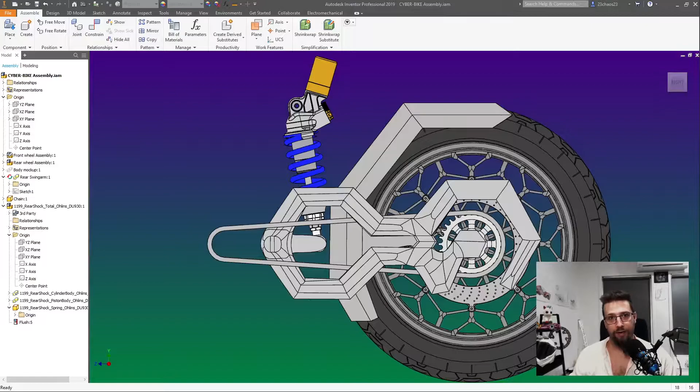But first, let's go over what I've done in the meantime, because I said I'd do some stuff off camera, and I have. I've got quite a lot done off camera. Ta-da! See, I got quite a bit done. This is what we got done. Quite a bit, right? I think so too.

So what is this? Well, this is the rear swing arm. I've imported a set of shocks from a previous model I've used. I'll put the information and a link in the description to the GrabCAD model if I can find it again, I don't think I can, but I'll try.

So what did I get done? Well, you saw in the last episode we got the sprocket done and mocked up this part of the rear swing arm, and what I did off camera was scrap that completely. I kept the sprocket, but made the entire swing arm using freeform geometry. It's tedious, it's fiddly, a lot of just sitting there for about half an hour moving just 3 or 4 vertices until it looks right.

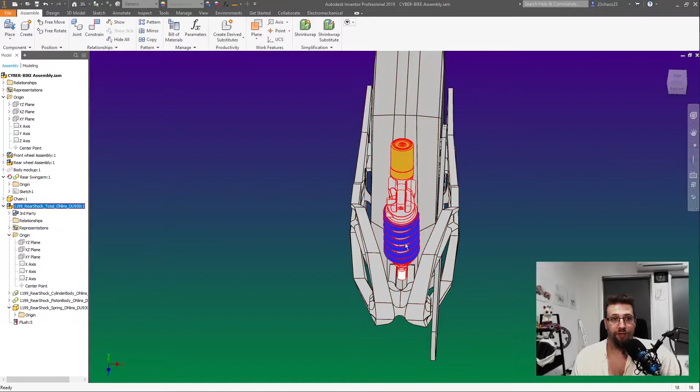It's not fun to watch. It's really not fun to watch. So you can see here we got the mechanism to attach the shock. We've got all the spacing for the... why are you turning sideways? That is bad, don't turn sideways.

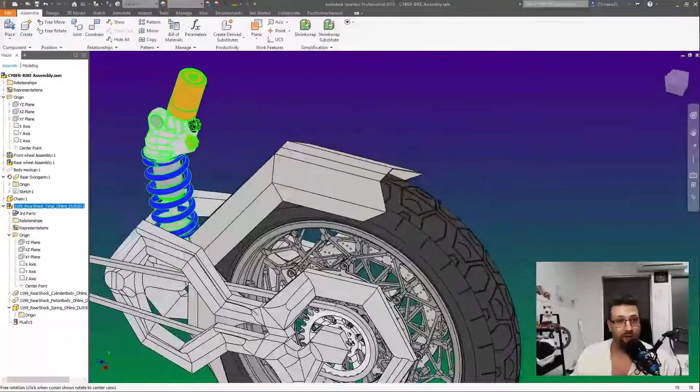Thank you. We got all the spacing for the chain, the bike chain, and I started working on how the calipers are going to interact with the brake disc and the swing arm. There's not much in the way of space to do stuff here, so I might be scrapping the idea of having 2 calipers and 2 discs on the rear wheel.

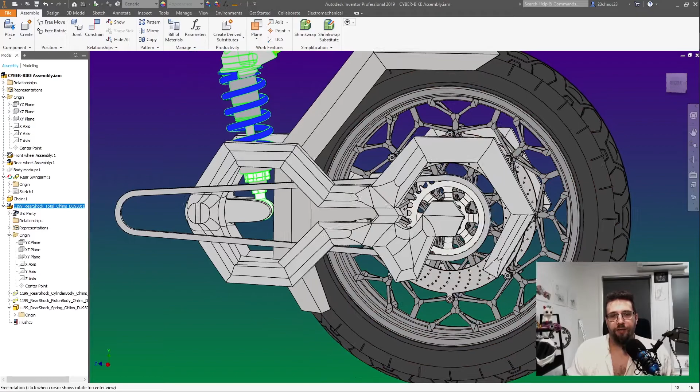This is not normal, it's not necessary at all. You do not need 2 brake discs on the rear wheel. The brake on the rear is rarely used on motorcycles unless you're racing or doing some emergency, oh shit, I'm about to die braking. You don't generally engage the rear brake, it's just not done unless it's for powerful motorcycles where you don't want to pop the wheel or do wheelies, so you just tap a bit of back brake when accelerating and it keeps the front wheel down.

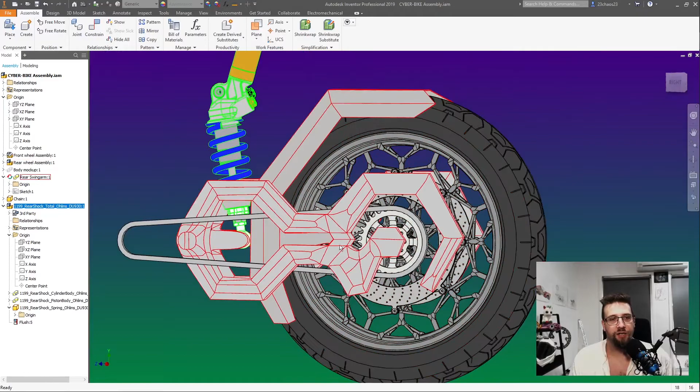They do this in Superbike and MotoGP when racing, to keep the front wheel down when accelerating off the line. Same thing. So I'm not happy with this hook thing at all. I may change it, I might get rid of one of the rotors on the back and just have the one on the other side.

But we'll see. We need to discuss something a little more important, because for the spacing of the rear swing arm, the clearance between the swing arm, the mudguard, the chain, the sprocket, rotor, tire, and the rim. There's a lot that I just listed, and it all has to sit within a certain amount of space, with lots of fast moving parts, spinny bits, stationary bits, bits sliding against each other, bits engaging each other, like the chain and sprocket.

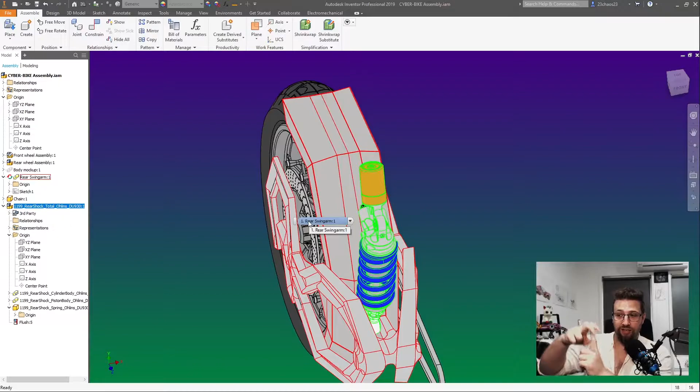There's a lot going on in a rear swing arm and rear assembly on a motorcycle, and it all has to work. Has to. If it doesn't, shit explodes. If you've never seen a chain come off a rear sprocket when a bike's moving, go look it up.

It's insane. So that's what we got done off camera. Quite happy with the amount of progress.

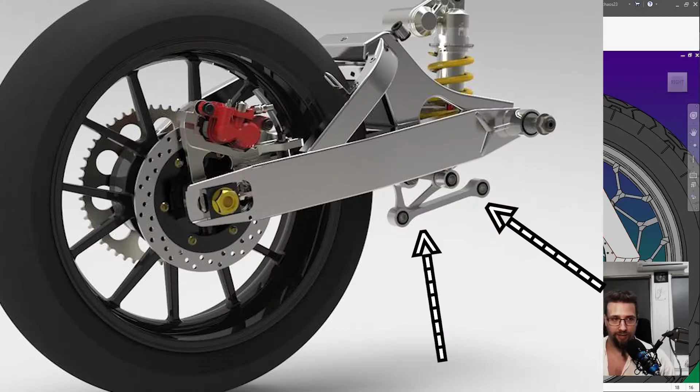A couple of things I still need to research and learn how to do. One is a travel multiplier assembly for the shock absorber. Normally in rear swing arms, there are other linkages and levers arranged in a certain way that when the swing arm moves a small amount, it multiplies that travel through linkages to the shock absorber, so the shock absorber moves further than the swing arm did and reduces the force applied to the shock absorber. So it's a travel multiplier but a force divider, through some complicated linkages.

Not really complicated, but I need to go learn how to do that, because at the moment this is not right. Having it directly applied like this, it won't work. There's going to be too much force and not enough travel distance allowed through the shock for this to work properly, so I have to go learn how to do that.

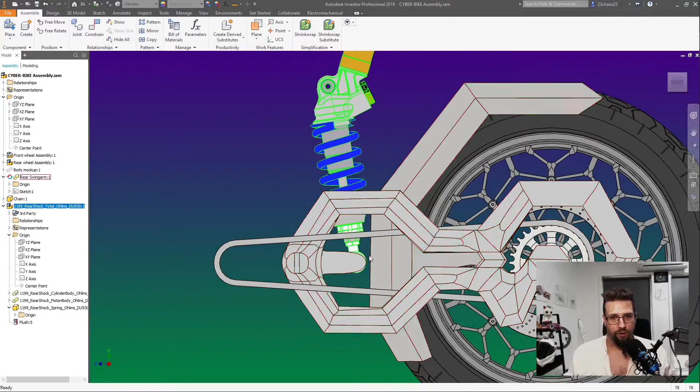But today's video is not about that. Today's video is about brake calipers. Oh boy, there is a lot going on with brake calipers. They are a complicated subject. There's a lot of moving parts, a lot of engaging parts, a lot of stationary parts, and a lot of non-stationary parts - meaning they move, but they're dynamic. They're non-stationary dynamic parts that change over time.

For instance, the brake pads, as they wear, their thickness changes, which means other moving parts like the cylinder head have to travel a different distance and be in a different position compared to a brand new brake pad. There's a lot of stuff going on. You have thermal engineering, ablative engineering, hydraulic engineering, and mechanical engineering of course. There's a lot of different things that have to be accounted for when designing and considering how brake calipers work.

The other thing that needs to be considered is industry standard. Here's a topic we're going to have to come back to time and time again with this project, because with motorcycles, industry standard is the industry standard. A lot of companies make parts, consumables like brake pads. There's a list of stuff - tires, all that stuff - that conform to industry standards.

Things are the same across the board, so you can go to a shop and get a non-OEM part to replace the part on your vehicle at a lower cost, or just because you want something different. They all follow certain rules, and we're going to have to apply those rules through this project.

One of the places where this is really critical is brake calipers, because the brake pads aren't made by the OEMs or the motorcycle manufacturers. They are made by brake companies, and they have standard forms, shapes, and designs. Sometimes a big OEM manufacturer will come along and say we need a caliper that looks like this because it has to fit our new bike, and they make a new pad that works for it.

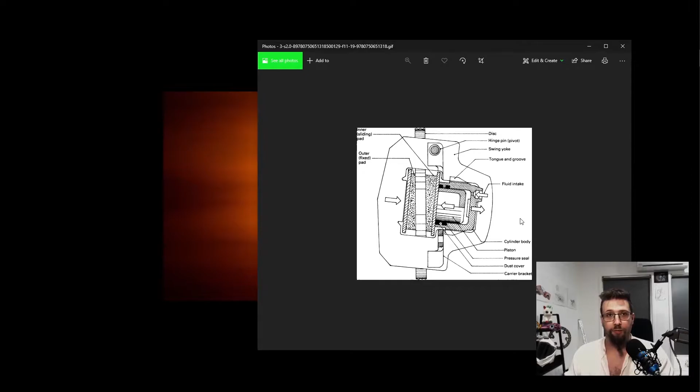This is counted by the number of cylinders you have on each side of the rotor. Some calipers have a cylinder on just one side, and then there's a mechanism that equalizes the pressure on the two pads. One of the simplest versions of this kind of mechanism is the pivot caliper. This works through a simple process: you have a pivot point here and a single cylinder here. When the cylinder engages and pushes on this pad, the entire assembly shifts, and when it shifts, it then applies pressure equally on the other side.

This means that your pads, as you can see here, have a trapezoid shape. Is it trapezoid? No. Scalene? I think it's scalene. No? There's a name for this.

Anyways, they still try to wear evenly, but the point is that they start off uneven, and you only have this limited lifespan of pad at the bottom here, and you end up wasting this much pad at the end of the pad life, which isn't ideal since you don't go all the way to the bottom. It's really unrecommended to go to the bottom of your pads. This is probably the simplest design of single cylinder caliper, but I don't like it.

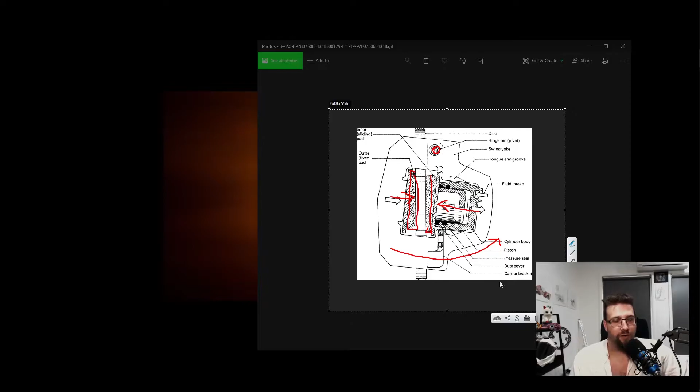There are other problems involved. If your alignment to the disc rotor, or the disc rotor has a warp in it, a bend, or damage, these things create violent vibrations in action and all sorts of other problems that I really don't want to deal with. So this one is a no-no.

The next kind that we have is the floating caliper. It's the same principle: you have a single piston on one side, and when this cylinder engages, the entire assembly will float, usually on a set of rails with rubber bushings, and the entire assembly will then move this way, which engages the pad on the other side with an equal amount of force.

These are very common, but as you can see, it requires a floating point, a point of friction. They're actually very simple to manufacture. They're one of the most common brake calipers out there. You can see this is for a vehicle with a vehicle rotor, much thicker. They work very well. They're space efficient, so they don't take up as much space inside the wheel assembly, and that's why they're commonly used on cars and stuff.

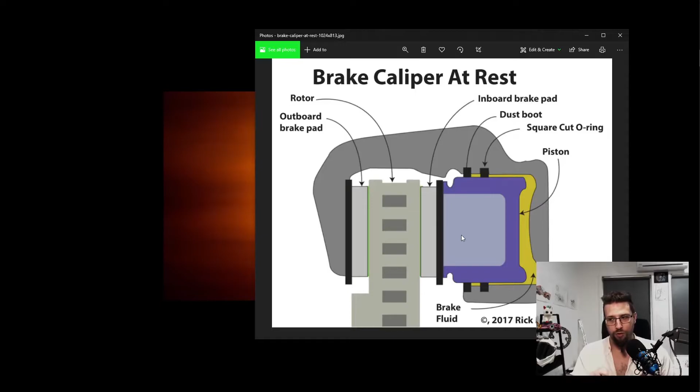But the caliper with the most performance is the dual cylinder caliper. And the dual cylinder caliper is also probably the hardest to manufacture, because you have internal channels for the hydraulic brake fluid to travel through.

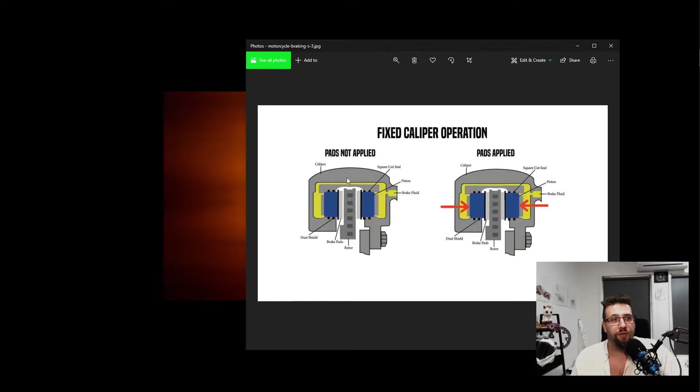All of these different calipers are generally cast materials. Some of them are billet machined housings. Some dual cylinders are split - this is a good example of a split caliper. You have a machined part, it starts off as a cast, but they do billet machine it. It's either cast or billet machined caliper housings.

You have two parts, secured using screws. One of these screws is a special kind that has a through hole, which allows the hydraulic fluid from one side to travel to the other side and equalize the pressure against the two pistons. This is a 6-cylinder pad, but it is a dual cylinder caliper.

These are very high performance, and this one in particular is the one we're probably going to model after for our perimeter rotor. Thank you, Ivan, in the comments of the last video for suggesting it's called a perimeter disc. That does seem to find more results on Google when you use those terms.

So this is the caliper that is used on the Buell motorcycle. Now, we're not going to go out and buy Buell motorcycle parts because I had a girlfriend with a Buell and the parts are expensive. They are very expensive, and we will more than likely only go with the pad itself, and find dimensions for the pad and design the rest of our caliper around it.

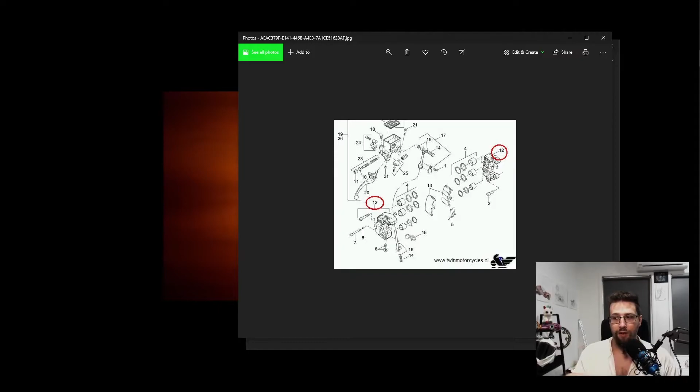These are special in the way that the pad attachment points are on the inside of the radius of the design, whereas normally the connections and bolt-on points are on the outside of the radius because the rotor is on the inside.

This is what we're going to go with, but the number of types and designs are so many and various. This is a single cylinder floating design, similar to what's on my dirt bike.

So you've got a single cylinder, it's one-sided, and it is also on a floating rail. You have your attachment mount here, which attaches to the axle and the front forks. Then on top of this, you have your floating carriage where the caliper itself, which is a single piece, floats using these pins, and it slides into position to equalize the force on the pads.

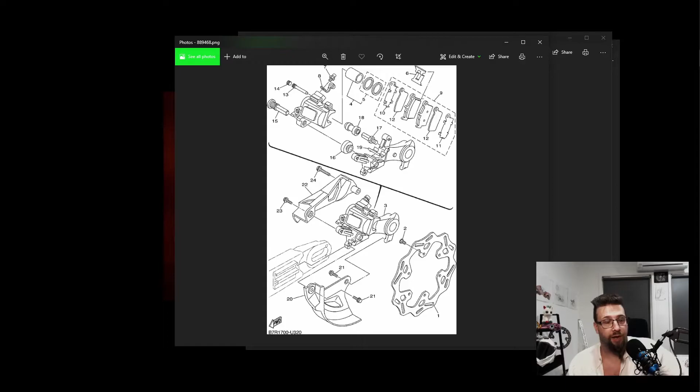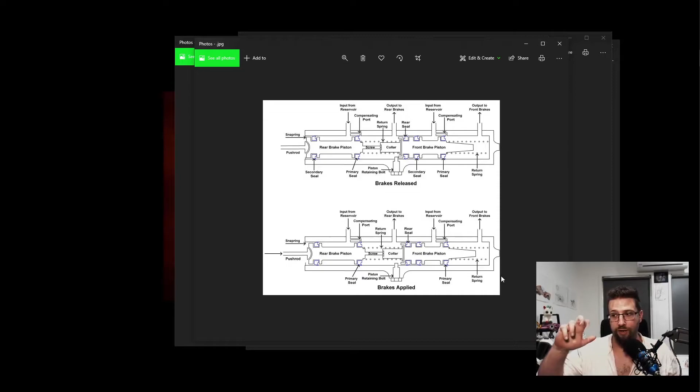We have other things we can consider later on, like the master cylinder itself, which is the hand trigger thing on the handlebars. That uses a system that allows for compression, force release, and return of hydraulic fluids. This is a simplified cutaway of how that works.

This is an external radius caliper design. This is a Brembo brakes design for motorcycles. This is one of the more difficult ones.

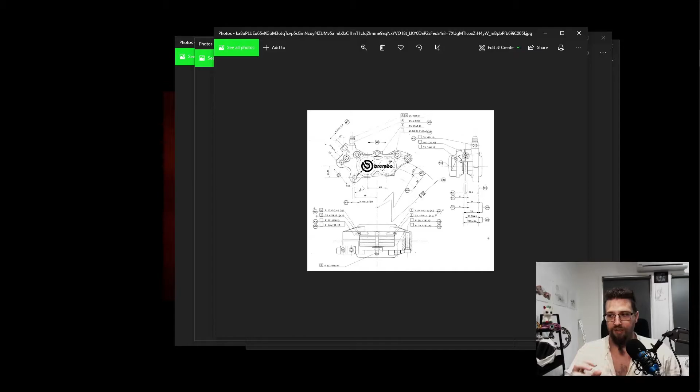I believe this is a single piece unit. So when this is cast, there is a negative. The negative of the fluid channels and the cylinders is a sand casting that gets placed inside the die cast. When they cast it, they then cool it down and flush out that negative with water and whatever else. I don't know how they do it specifically, but I understand the concept of using negatives inside of molds to create cavities.

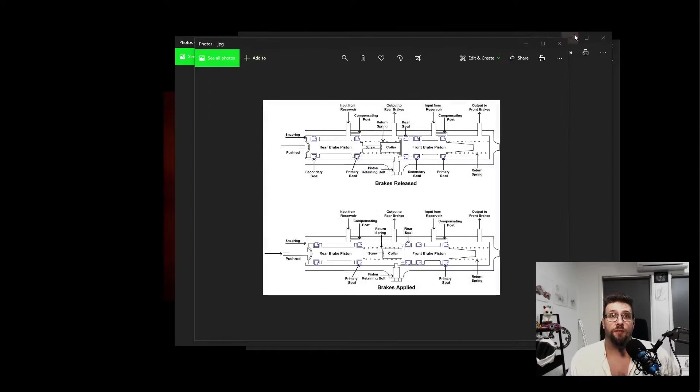And yeah, so that is the quick and dirty of brake calipers. It's not the most interesting thing in the world, and if you're like me, it's pretty freaking interesting because there's so much to get into.

The other thing we're going to get into in this video just a little bit is O-rings, rubber. We have to talk about rubber.

But let's talk about O-rings. So when you need to learn how to do something, Google is your friend. I love Google, Google taught me so much. When you design things like calipers, there are seals.

Seals that stop your hydraulic brake fluid from blowing out all over the road, all over your bike, all over you, all over your passengers, all over the pedestrians on the sidewalk, and the old lady walking her dog. You need to know about O-rings.

I needed to know about O-rings for a different project when I did my own product design for a vaping product. I needed to learn how to use O-rings for a particular part of the design, and I had to learn how O-rings work in a mechanical sense.